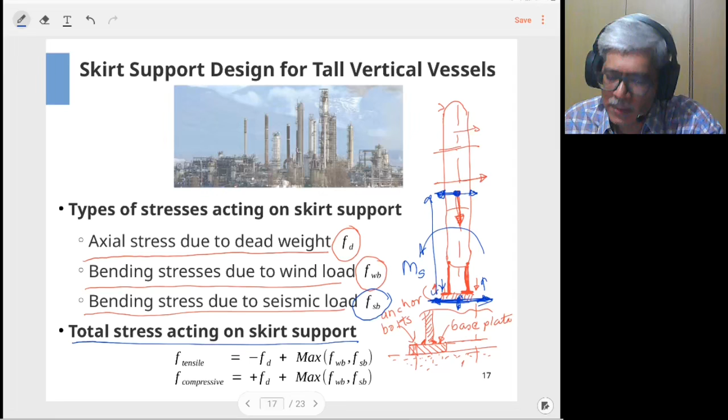So the total stress acting on the skirt support is given as a combination of deadweight stress and bending stress. The maximum tensile stress would be the tensile stress because of wind or seismic. Wind and seismic on one side will cause tensile stress or uplifting stress on the cylinder.

So that tensile stress minus the deadweight stress. Why minus? Because the deadweight stress is always compressive. Although the seismic stress will be compressive at one end and tensile at the other end in the cylinder, we are talking about the stresses in the cylinder. The deadweight stress, irrespective of whether you are talking about this end or the other end, is always in the downward direction. So they will negate each other, that's why you have the minus sign for the deadweight stress.

And the total compressive stress is the compressive stress because of wind or seismic, whichever is maximum, plus the deadweight. So they will be additive to each other. In that sense, you calculate the stresses in the skirt.

So there will be a maximum tensile stress in the skirt, and there will be a maximum compressive stress in the skirt. For both compressive and tensile, there are different allowable stresses.

For tensile, you will consider the yield strength basis or ultimate strength basis. So yield or ultimate strength divided by factor of safety will give you the allowable tensile stress. However, for compressive, you'll have to do a buckling calculation.

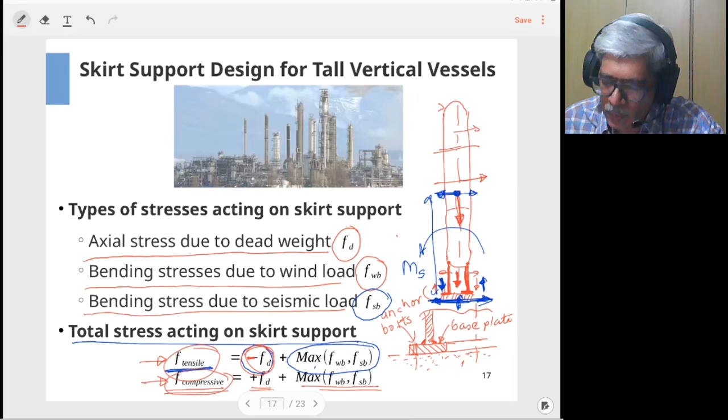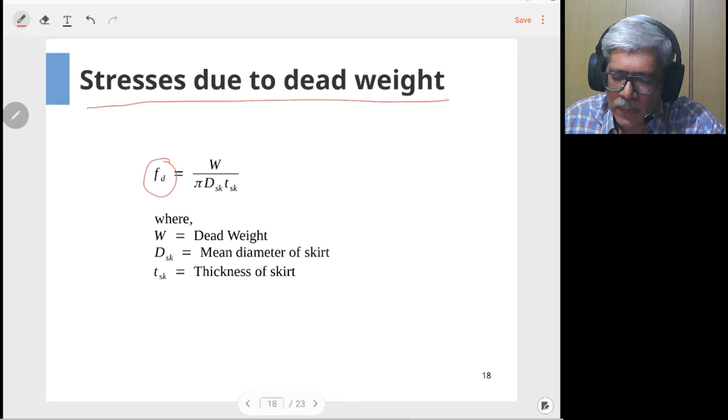Okay, so let's move ahead. How do you calculate stress because of the dead weight, that is FD? It is simply given by the load divided by the area of the skirt.

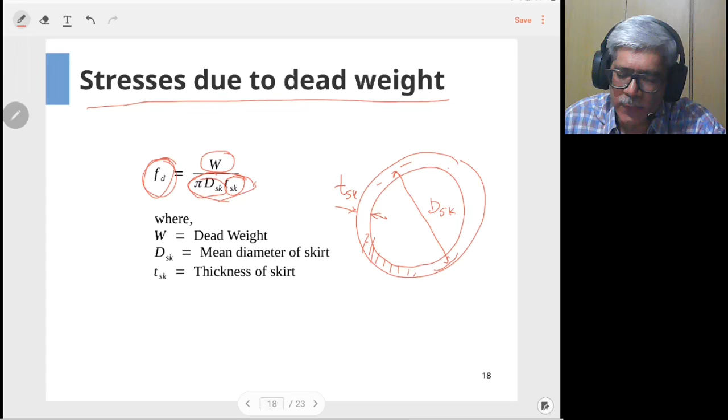If you look at the top view of the skirt, DSK is the mean diameter of the skirt, and TSK is the mean thickness of the skirt. So pi into DSK is the mean circumference, multiplied by thickness will give the total cross sectional area of the skirt. Weight divided by the cross sectional area will give you the stress. That is how the deadweight stress is calculated.

Now we will go into details of how to calculate the moment because of the wind load. We first calculate the moment due to wind load, and then we calculate the stress because of this bending moment.

Consider a vertical vessel supported on the skirt. As said in the previous slide, the wind force keeps changing as the altitude changes. Wind force is maximum at the top part of the vessel and keeps decreasing. This variation is available in the design code we talked about previously, and from this you will get at which altitude what wind pressure is to be considered.

Accordingly you will divide the vessel into different sections. So there will be different sections, let's call this section 1, section 2, section 3, and so on. For each section you will have a particular value of wind pressure, which I am calling small p, p1, p2, or in general small pi. For every section there will be a different value of wind pressure which you will get from the wind design code.

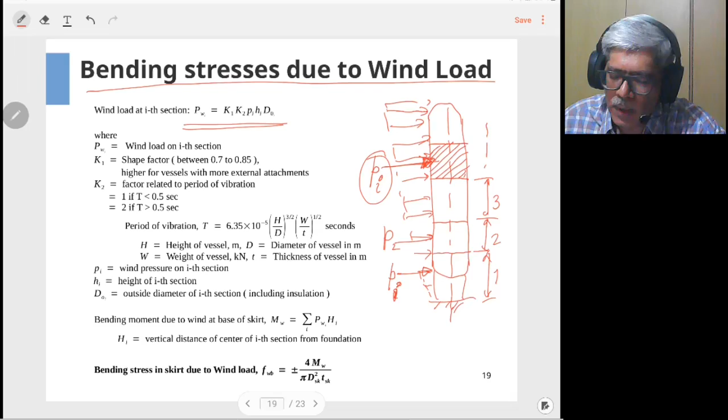Now the load acting - on the ith section the pressure is small pi. The total force acting on this ith section is given by the formula shown here. Let me zoom in so you can see it clearly. This particular force is given in terms of the pressure on that particular zone Pi, which you obtain from the wind design book or wind design code.

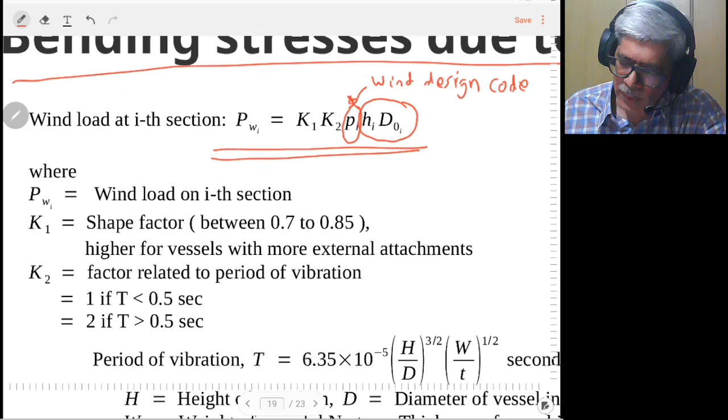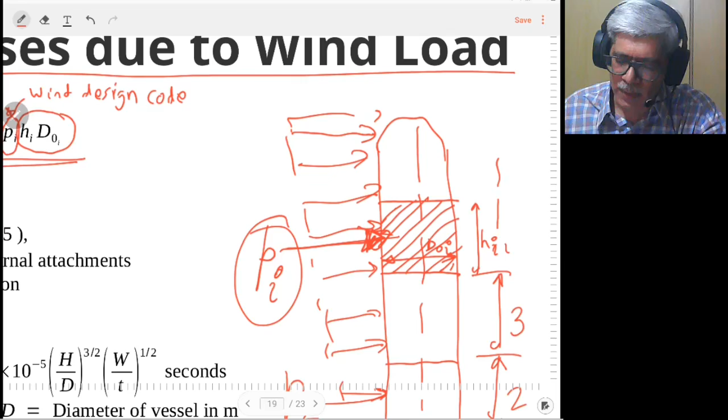The product HI into DOI, where HI is the height of this section, and DOI is the outside diameter of this particular section. That gives you the projected area on which this wind pressure is acting. Looking from the top, DOI is the area subjected to the wind, which is obstructing the wind flow.

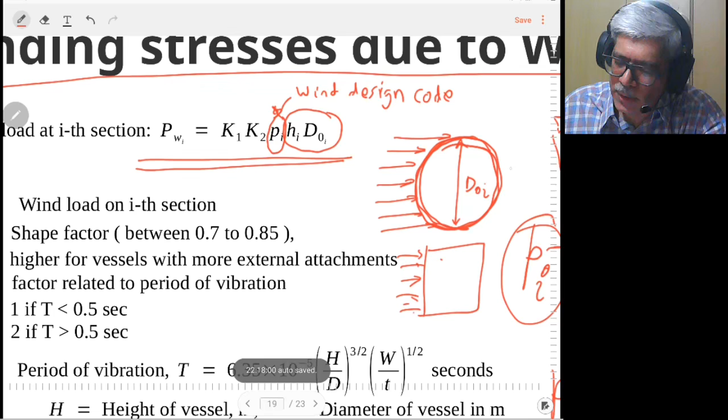Now as you can see, the total net wind force acting on this circular shape will be different than if it was, for example, a rectangular building. The net force which acts on a structure depends on the shape of the structure. That is taken care of by the factor K1, known as the shape factor. For circular or cylindrical structures, which we are dealing with here, this factor is between 0.7 to 0.85, and it is higher for vessels. This 0.85 is for vessels with more external attachments.

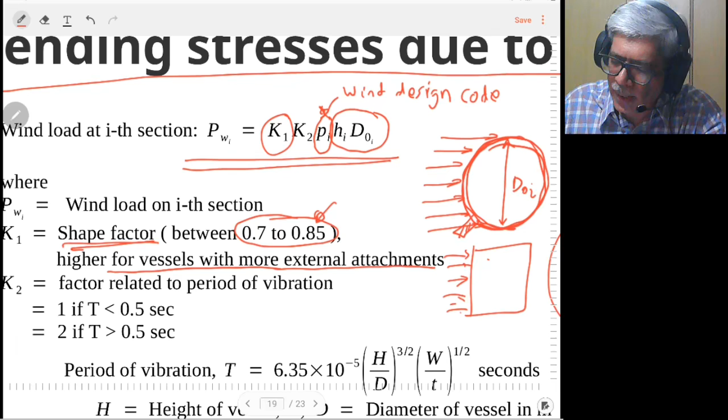So here there are a lot of ladders or platforms or piping moving around the vessel. In that case you will consider a higher factor, otherwise the minimum factor of 0.7 is what you will have to consider in the design.

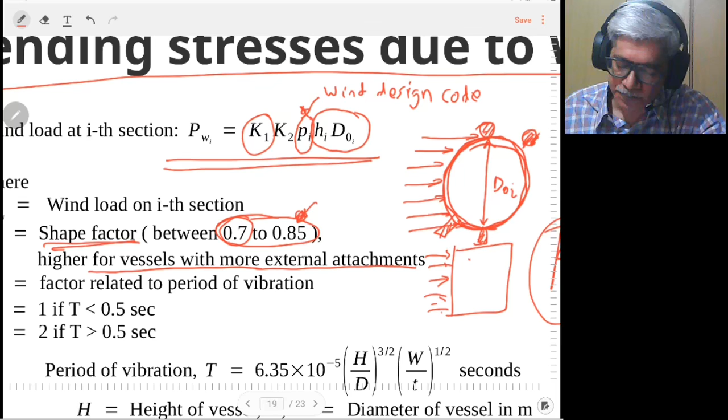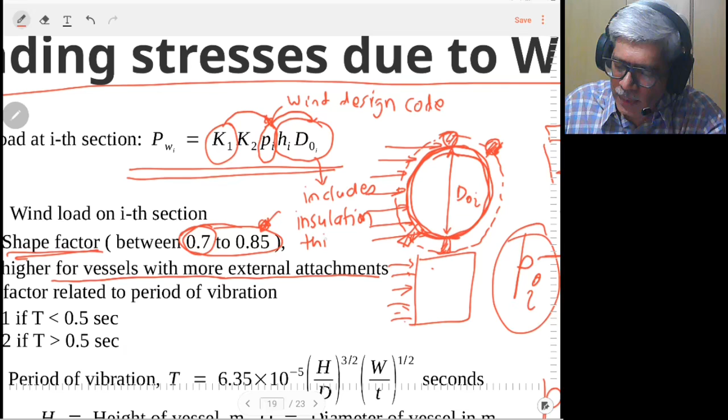Theoretical force is given by shape factor multiplied by pressure multiplied by the projected area. When talking about the area, if the vessel is insulated, you consider the diameter including the insulation. So D0i will include the insulation thickness if it is given. If it is not given, you have to proceed with the actual metal diameter.

The factor K2 is related to the dynamic response of the vessel. It depends on the natural frequency or the period of vibration of the vessel, specifically whether the period of vibration is less than 0.5 seconds or more than 0.5 seconds. This is an empirical approach, and the factor K2 would be either 1 or 2.

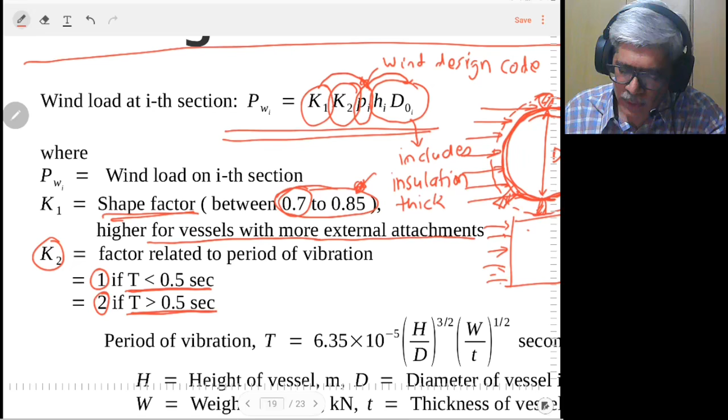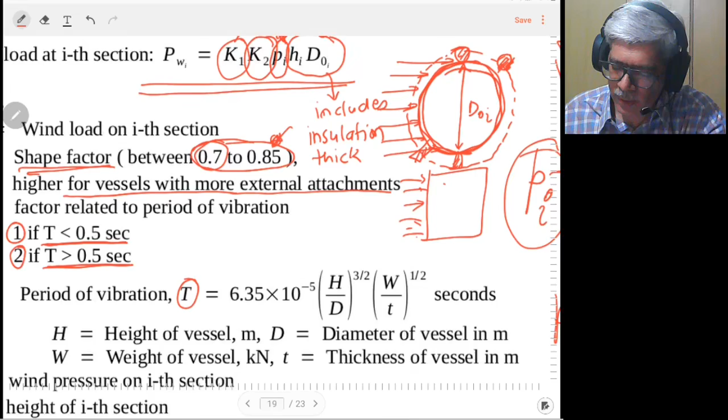For determining K2, you should know the period of vibration, given approximately by the formula shown here: 6.35 into 10 to the power minus 5, multiplied by h by d ratio and w by t ratio raised to certain powers, given in seconds. You have to note the units for h, w, d and t. Although in the exam the formula would be given to you, you have to remember what units to use for this formula.

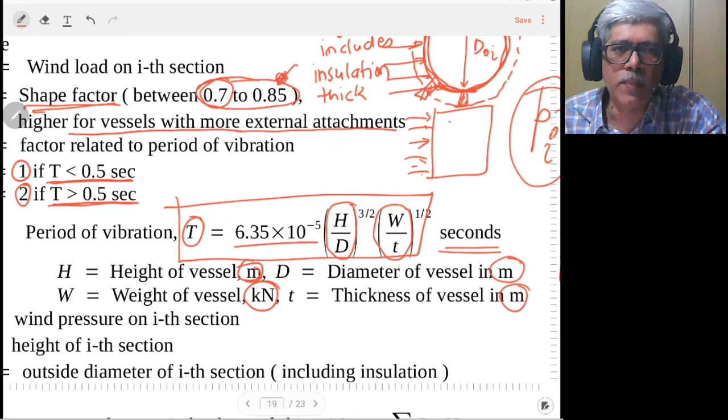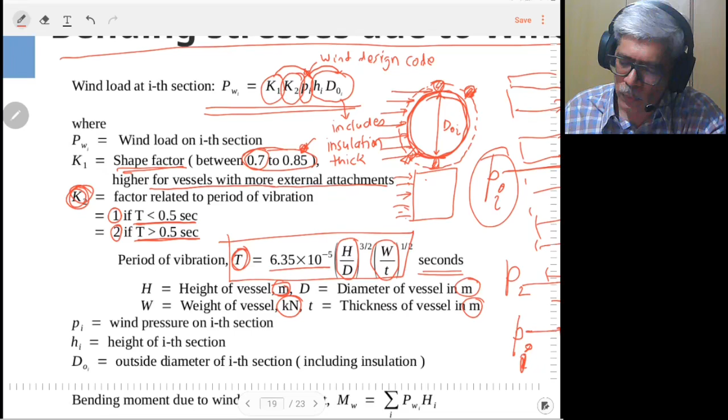Once you use this formula, you find the period of vibration, and using that you can calculate the factor K2. Once you know K2, you can calculate the wind force acting on the ith section. For the ith section where the wind pressure is Pi, the force is given as Pwi, the force acting on that ith section.

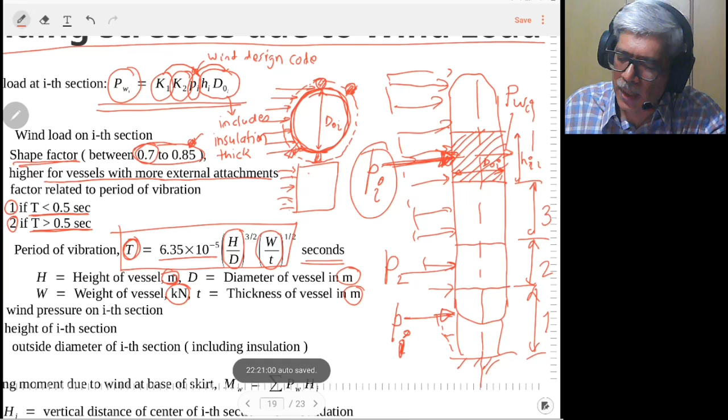So you'll have the force acting on the first section: Pw1, Pw2, Pw3, and so on. So at different sections, different forces would be acting.

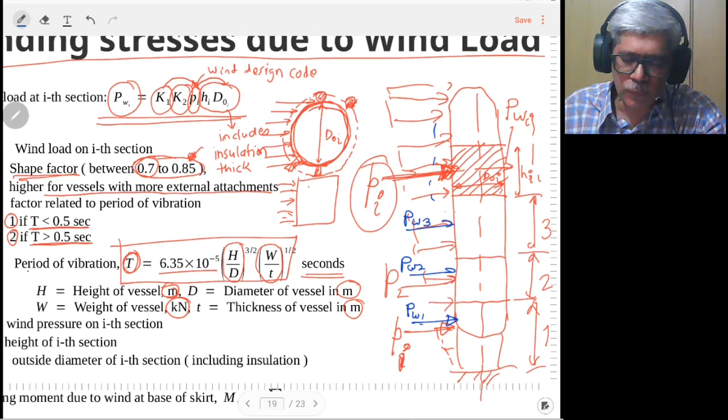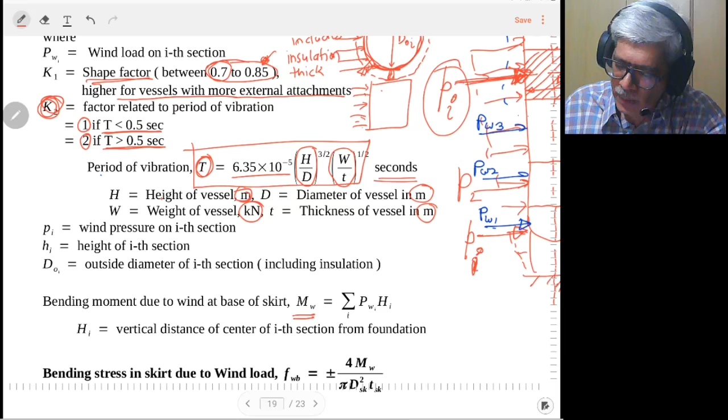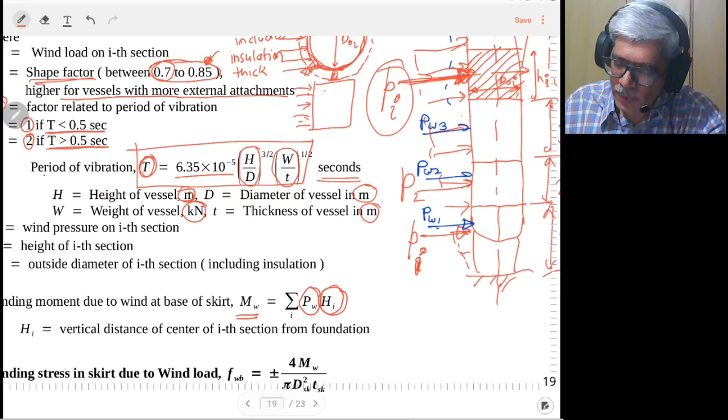Once you calculate these forces, the total moment at the support is given as the multiplication of the force by the location of that force from the base. This capital HI is the location of the force from the support.

For example, if you are talking about Pw3, then HI would be the distance between the centroid of that section and the base. So this is H3, the distance to the centroid of the third section.

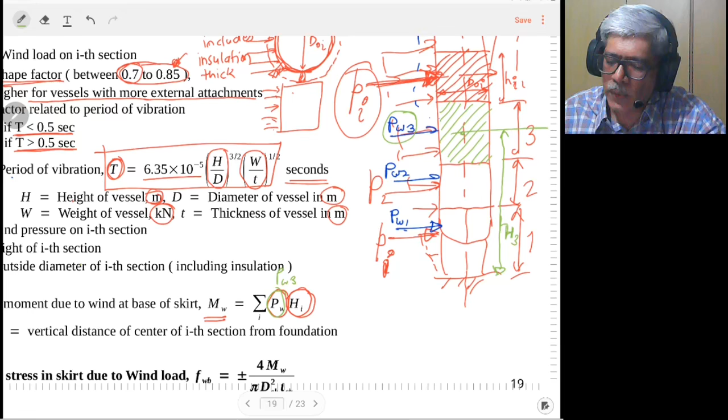In that way, for every section you have to calculate the force multiplied by the distance, and you will get the total moment acting on that particular section.

Once you get the total moment, the stress is given in terms of M divided by Z. So sigma bending is M divided by Z, where Z is the section modulus of the skirt cross section, given in terms of the mean skirt diameter and thickness of the skirt by this particular formula.

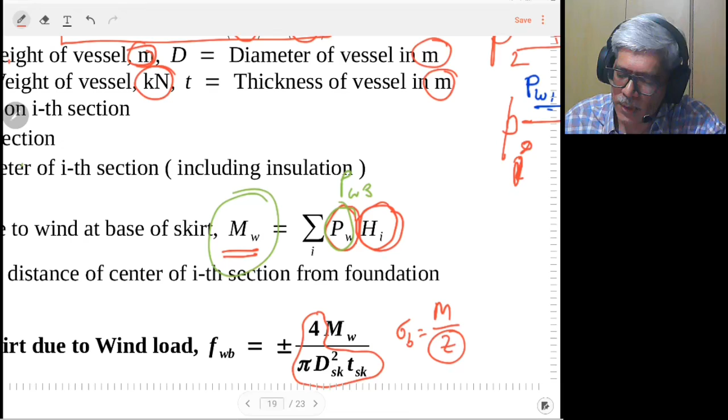This is the section modulus of the circular cross section of the skirt, and the plus or minus sign indicates that in this cross section, if the wind moment acts about this axis so that one side is compressive and the other tensile, the highest compressive stress occurs at one point given by this formula, and the highest tensile stress occurs at the diametrically opposite point, given by the same formula with a different sign. The tensile and compressive stresses occur at two opposite ends, and in between, the stresses vary.

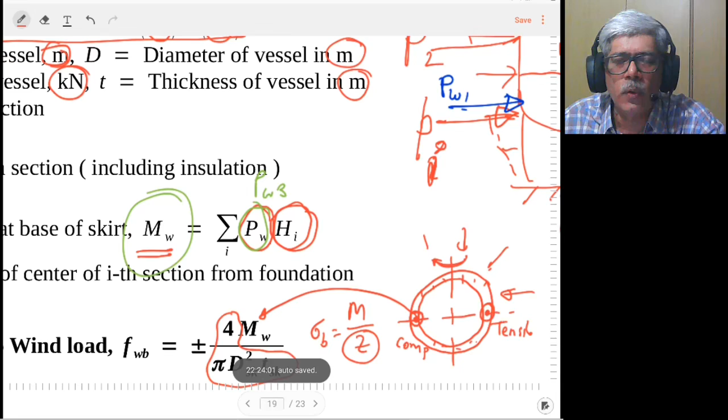Since the wind force can act in any direction, we are assuming here the wind acts from right to left to cause this moment, but the wind can act in any direction, so all the points are critical. The entire cross section need not have the same stress levels.

That is the summary of how we calculate bending stresses due to wind. You break the vessel into different sections, calculate the wind force for each individual section, take the moment of that force at the bottom point of the skirt or base level, and add all the moments from different section forces to get the total moment. This moment divided by the section modulus of the skirt cross sectional area gives the bending stress, which is tensile at one point of the skirt and negative at the diametrically opposite point. Since the wind can act in any direction, all points are equally eligible for failure.

Now let's look at how we deal with the seismic moment.